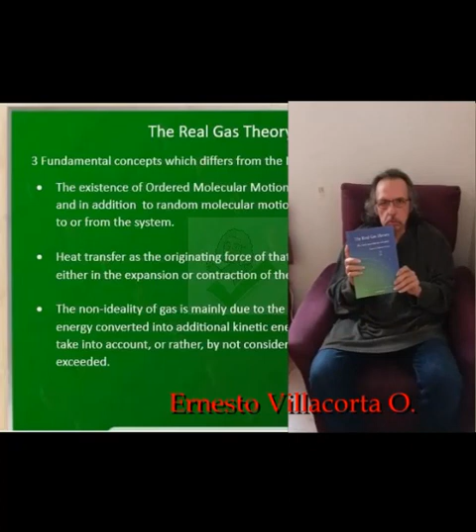Lastly, the non-ideality of the gas is mainly due to the portion of transferred heat energy converted into additional kinetic energy that the ideal gas does not take into account. By not considering it, that value is short or exceeded. Although the non-ideality affects the entire process, it is not exclusive to movement, but it is in the movement where it impacts practically in its entirety.

The portion of heat energy converted to kinetic energy is called the momentum enthalpy. The adjustment to the ideal gas so that it behaves like a real gas is called the residual enthalpy, and the equation obtained, its product, is called the residual enthalpy equation.

When the ideal gas behaves the same as the real gas, then the residual enthalpy is equal to 0, and when the ideal gas deviates from the real one, it is the adjustment that levels the relationship.

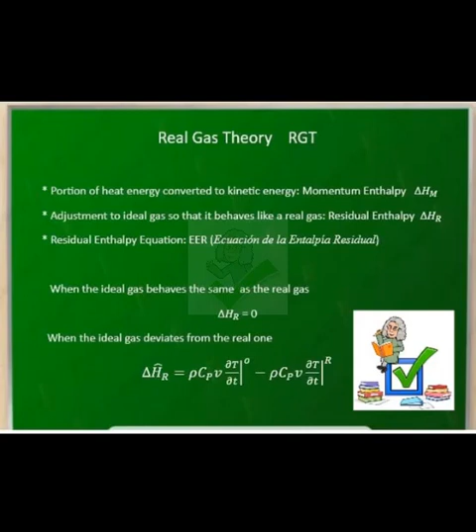The nature of the molecule intervenes in its energy conversion capacity, from calorific to kinetic. That is, intermolecular forces impact non-ideality, but the best way to take it into account is through the heat transfer mechanism. So oxygen, for example, has a different energy conversion capacity than nitrogen, as well as a different heat capacity and thermal conductivity.

The so-called equations of state are supported by factors that work inconsistently. That is, they can work well, but only for specific pressure and temperature ranges. Some may work satisfactorily for most cases but will inevitably deviate from the real value for some conditions or compounds. This is because these equations do not fully describe the thermodynamic phenomenon.

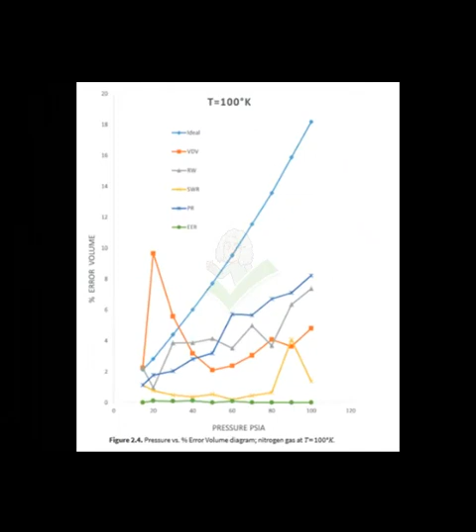Another way to visualize the expansion and contraction of a gas is presented here. Conventional texts handle the expansion of gas as a product of the increase in its temperature, resulting from an increase in the kinetic energy of its molecules, and the contraction as the reverse process. This is universally accepted, and this work is no exception.

The divergence with this theory consists of the trajectory these molecules follow when they are excited. By convention, it is accepted that these molecules collide and travel in a disordered way in random directions. Their trajectory depends only on the collision, and therefore the pressure is the product of millions of collisions with the walls of the container. RGT maintains that this is only partially valid.

In addition to random movement, we must add an ordered movement whose trajectory will depend on the geometric shape in which heat is being transferred to, or from, the system. Pressure changes are also related to the acceleration and deceleration of molecules.

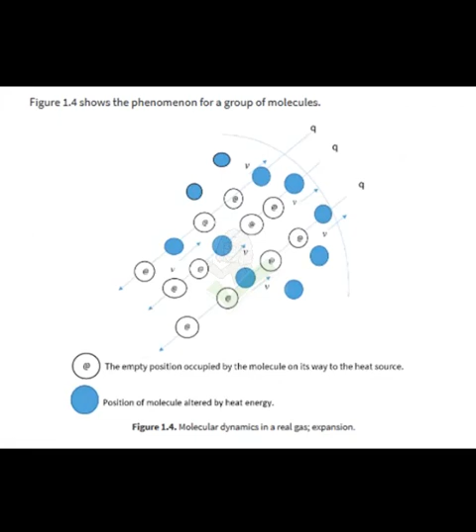Let us consider the following. Suppose you have a container 3 meters high and 2 meters in diameter with a 2-inch nozzle. This tank has any gas at a specific pressure. Under this scheme, the nozzle area represents only 0.02% of the total internal area of the tank.

The assumption that random collisions with the wall generate pressure suggests that, at the moment of opening the nozzle, the gas contained inside will come into contact with the outside, and consequently, the tank pressure will decrease because some of the gas molecules inside collide with each other and will come out through the hole as a consequence of a momentum generated by the collisions.

How, in a tank, does a system go from being chaos to being an ordered system only by passing through a hole? Because, while the nozzle itself could be the channeling of molecules, it would be at short distances between them and lower speeds, not at the random distances and speeds at which the molecules of a gas move in the MKT. That is, it would be at a distance between molecules and their velocities of a molecular flow, not of a random movement.

How is it possible that there is an orderly movement coming out of the nozzle instantly if there is chaos inside? What is the probability that a molecule will leave by 0.02% of a total area due to random collisions? Is that probability proportional to the rate at which pressure is released in the tank?

In this work, it is argued that, on the contrary, when excited, molecules undertake trajectories with defined tendencies towards a certain geometry. This geometry depends on the spatial form in which heat is being transferred, so that the molecule will take the opposite direction as the heat transfer.

The RGT states that chaos was ordered in density and pressure transient profiles, before passing through the hole.

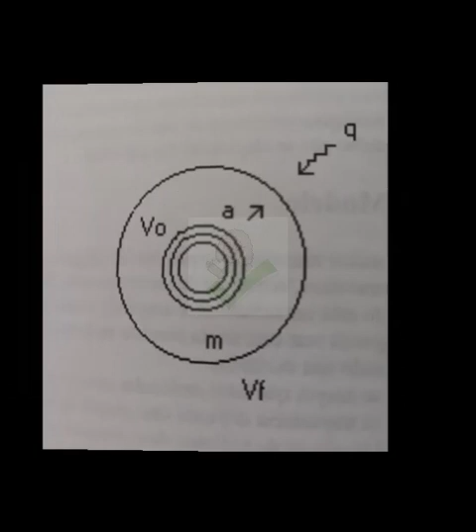Let us imagine a gaseous sphere of mass m, that is subjected to the action of a heat source Q. This sphere has an initial volume V0, and through the action of heat increases its volume to Vf, at a constant pressure. Located on the edge of V0, what can be seen is the movement of a vector normal to a plane with a velocity during a time t.

From the macroscopic point of view, this physical phenomenon can be considered a concentric flow stimulated by a change in density in the concentric layers, where the density and enthalpy profiles are generated by the temperature differential resulting from heat transfer. Figure 1.1 shows this system.

These transient profiles could be seen as expansive or contractive waves like water waves, whose velocity is a component of total molecular velocity. Like balls bouncing inside a truck that moves slower than them, that group of molecules already experience intermolecular forces, due to their proximity, so that these molecules travel in a group, apart from random movement, and behave already as a molecular flow.

Like any fluid flow, its molecules have the velocity of flow and the molecule's speed that make up it. The profiles are defined as transient because they fall apart eventually, and the molecules that formed them will separate.

The formation of transient profiles could be visualized as an equivalent phenomenon to when air is fanned. This creates profiles formed by the momentum transmission generated by the propellant object, but the gases that make up the mixture are elastic and eventually the molecules recover the separation between them. The velocity of the flow generated by the propellant is usually much lower than the random molecular speeds of its molecules.

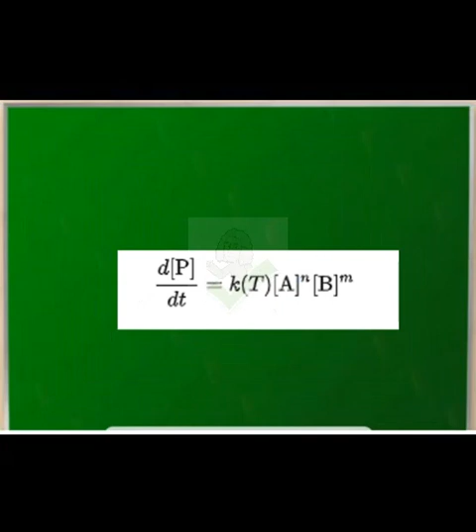The validity of MKT has been confirmed in different ways, for example, the rate of reaction in chemical processes. It is important to say that the RGT, rather than being an objection to MKT, it is a complement to this theory. It helps to explain circumstances that the MKT cannot explain, such as the case cited regarding the tank.

On the other hand, suppose you have a stoppered flask subjected to a heat source through the glass boundary. According to collision theory, the heat causes a molecular excitation in the contained gas leading to numerous shocks against the glass, which would cause the pressure to increase to the point of fracture of the glass.

Now, if the procedure is repeated but with the flask uncovered, it would be assumed that the event would be the same since the collisions are due exclusively to molecular excitation. However, the reality is that, under the latter conditions, the flask does not fracture.

Why? What is the reason that prevents the flask from breaking? If the collisions and trajectories are assumed to be totally random, they do not depend on the presence of a stopper. Furthermore, if we grant that the excited molecules exit through the hole instead of hitting the glass, how do we explain when they stop coming out of the hole? This question cannot be answered by collision theory.

MKT cannot explain how the leakage of molecules in an open flask, subject to a heat source, is stopped eventually. The explanation can only be given through a connection between the microscopic and macroscopic vision of the aforementioned phenomenon.

That is, the equilibrium between two momentum-generating forces, the pressure differential dP and that of the momentum enthalpy, and this is because of the formation of transient pressure and density profiles.

For MKT this does not happen because of random movement, separation between molecules and the absence of intermolecular forces, but neither does it explain how it is that the molecules at a certain moment stop leaving the flask, or how they be ordered from the chaos before leaving the tank, as it happens in reality.

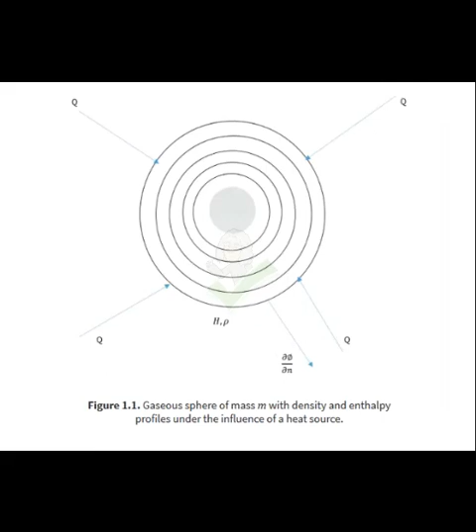The RGT explains this through the formation of transient profiles, and this, if and only if, there is heat transfer to or from the system. That is, in the absence of heat transfer, such profiles are not formed.

As a result of an energy balance that we will see later, we obtain the differential of the momentum enthalpy. The negative sign in the equation means that the direction of the velocity vector is opposite to that of the heat transfer. So how to explain the phenomenon that occurs inside the flask shown above?

The transferred heat generates transient profiles of density, enthalpy, and pressure, as shown in figure 1.6. This creates two opposite forces. The first is represented by the differential of the momentum enthalpy, and the second can be defined as the momentum generated by a change in gas pressure, called Euler's equation, with the opposite sign to the momentum enthalpy differential.

So both forces generate the balance to avoid the fracture of the glass, and it establishes that there is a limit on the leakage of molecules from the open flask. In figure 1.6, as the temperature continues to rise, a point will be reached where the outward directed momentum will dominate over its counterpart, and the glass will fracture because the plug does not allow pressure to be released. The molecules will push each other, transferring momentum to the glass and causing its fracture.

For the unstoppered flask in figure 1.7, the system is the same, with the difference that pressure is released through the orifice by allowing gas to escape until the pressure equalizes with atmospheric pressure. The molecules do not reach the necessary momentum magnitude to cause the glass fracture, due to the action of its counterpart. The rest of the gas does not leave because it is in equilibrium.

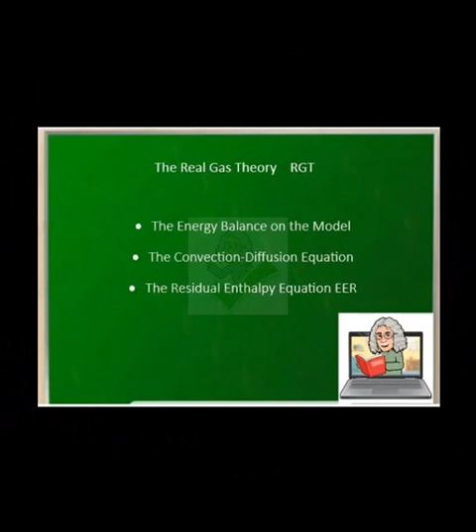The energy balance on the model, the convection diffusion equation, and the residual enthalpy equation EER. Applying the energy balance on a model, the energy change within the system accounts for three types: internal energy, kinetic energy, and potential energy. The energy of the surroundings consists of the heat transferred and the work done, shown in equation 1.1 or 1.2. Equation 1.3 shows how the heat is conformed.

The heat is composed of the enthalpy of the gas delta H, the momentum enthalpy, which is the portion of heat energy converted to kinetic energy, delta Hm, and the adjustment between ideal gas and real gas, delta Hr, which is called residual enthalpy. When the ideal gas behaves like a real gas, then the residual enthalpy is equal to 0.

But when the ideal gas moves away from the real gas behavior, the heat Q is equal to the residual enthalpy plus delta Hg, as shown in 1.3a. Delta Hg is the amount of caloric energy transferred for a real gas, and it is composed of the enthalpy of the gas and momentum enthalpy delta Hm, as shown in equation 1.3b. It is important to remember that delta Hm represents the quantity of energy destined to molecular movement.

Introducing the internal energy in equation 1.4, for the case where delta Hr is equal to 0, and considering only the work done by the mass of the fluid, then W equals delta PV in a process at constant pressure, where, in addition, the effects of gravity will be conveniently neglected. If we combine equations 1.3 and 1.4 with equation 1.2, we have equation 1.5.

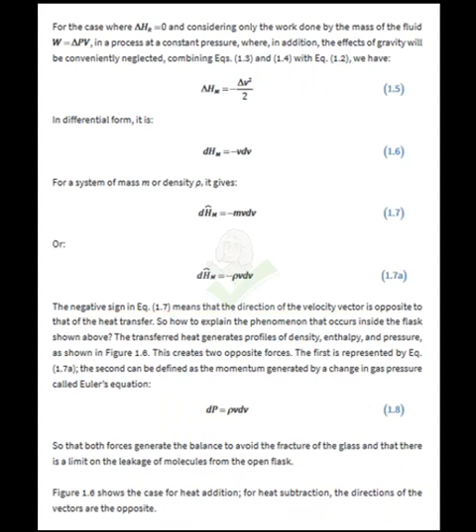We can use the convection diffusion equation to explain the concept of momentum enthalpy and residual enthalpy. Equation 1.9 is presented in two dimensions. The version of equation 1.9 for one dimension, applied to the ideal heat energy, gives equation 1.10. In equation 1.10, the first term on the right is the ideal caloric term, and the second is the ideal caloric inertial term.

The heat energy for a real gas is given by equation 1.11. In equation 1.11, the first term on the right is the real gas caloric term, and the second is the real gas caloric inertial term. It's important to notice that this last term is the momentum enthalpy, that is, the amount of caloric energy converted into kinetic energy of gas molecules.

The combination of equations 1.10 and 1.11 with equation 1.3a results in equation 1.12. The RGT maintains that, although the non-ideality of gas affects the entire process, it is in molecular motion where it manifests itself practically in its entirety. That is why it is considered that ideal and real caloric terms have very similar value, as shown in equation 1.13.

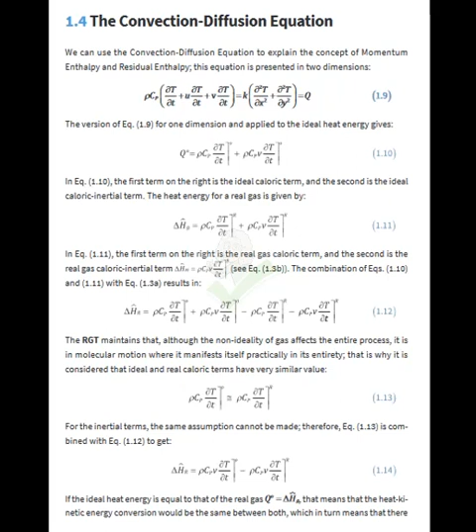For the inertial terms, the same assumption cannot be made, therefore, equation 1.13 is combined with equation 1.12 to get equation 1.14. If the ideal heat energy is equal to that of the real gas, that means that the heat kinetic energy conversion would be the same between both, which in turn means there would be no residual enthalpy delta Hr, and then the caloric kinetic terms would have the same value, as shown in equation 1.15.

Residual enthalpy delta Hr per time unit is related to the kinetic energy of the system and is the adjustment that levels the relationship between ideal and real gas. The box shows the possible circumstances for delta Hr, presented and drawn in figure 1.8.

If delta Hr is greater than 0, it means the ideal inertial term is greater than the real one; in figure 1.8 the vector of the ideal term is shown greater than the real one. If delta Hr is less than 0, the real inertial term is greater than the ideal one.

In figure 1.8 the vector of the real term is shown greater than the ideal one. If delta Hr equals 0, then both terms are equal, and so are their vectors.

The way to relate the parameters P, V, and T with the residual enthalpy, delta Hr, is the residual enthalpy equation, EER, presented in equation 1.16. Considering moles and mass, we get equation 1.17 or equation 1.18.

Notice that equation 1.19 shows that the adjustment of the ideal gas so that it behaves as a real gas, called delta Hr, is circumscribed exclusively to molecular motion, that is, an adjustment of the kinetic energy of the gas, as we saw in equation 1.14. That's why equation 1.16 is called EER.

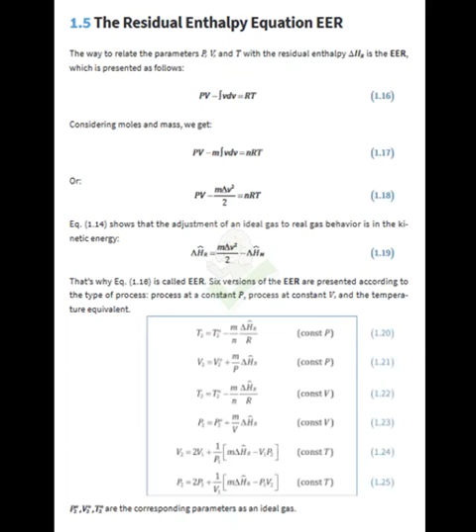Examples solved with different equations of state. Constant volume process: let us suppose an identical system described in figure 1.1, but now with a solid border as a container. The velocity of the furthest layer is equal to 0. For demonstration purposes, thermal conductivity is neglected in this border. We are looking to describe the thermodynamic phenomenon inside the sphere, not at the border.

For an ideal gas, the internal energy is a function of temperature only, so enthalpy and Cp are too. That is the reason why the heat may be obtained with equation 2.31. This applies for all types of processes, not only the constant pressure process.

Example 2.1: Nitrogen gas at 85 psia will be heated from 276 degrees Kelvin to 292 degrees Kelvin at constant volume V equals 2.2336 cubic feet. We want to know the final pressure. We take the system as 1 pound mass of gas, contained in an imaginary sphere container.

We have the following information from nitrogen thermodynamic tables. From equation 2.31 we obtain the amount of heat Q superscript O. The amount of heat, delta Hg, for real gas is obtained by subtracting the enthalpies of states 1 and 2. Using equation 1.3a with the calculated amounts of Q superscript O and delta Hg, we obtain the residual enthalpy, delta Hr. The pressure for the ideal gas is obtained as usual.

We take the system as 1 pound mass of gas, see figure 1.1. We have the following information from nitrogen thermodynamic tables. So we get the amounts of Q superscript O, delta Hg and delta Hr the same way as in the previous example. The ideal gas volume is calculated as usual.

Substituting these values with the information gotten in equation 1.21 results in obtaining the real gas volume. This value is equal to the datum reported for the experimental volume.

Table 2.1 shows several data for the volume obtained by different equations of state for a given temperature and pressure. The equations used are the ideal gas equation, abbreviated as ideal; the van der Waals equation, abbreviated as VDV; the Redlich-Kwong equation, abbreviated as RW; the Soave-Redlich-Kwong equation as SWR; the Peng-Robinson equation as PR.

And finally, the equation of this theory, the residual enthalpy equation, as EER. All these equations are compared to the experimental data reported, abbreviated as EXP. As shown in Table 2.1, the range of greatest deviation in relation to EXP is at high pressure and low temperature, as expected, with one exception: the EER, which maintains similarity with EXP across the whole range.

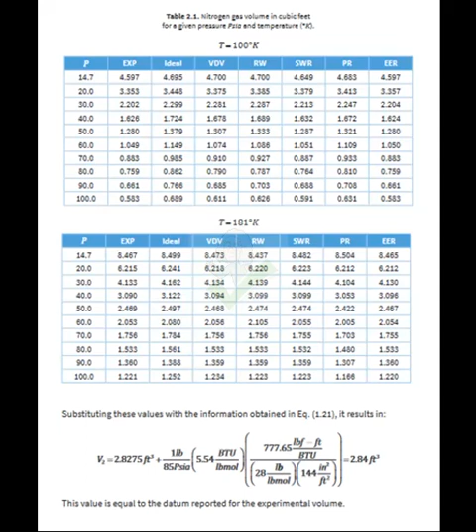For example, we chose conditions like high pressure and low temperature: the state at T equals 100 degrees Kelvin and P equals 100 Psia. The experimental datum for volume under these conditions is 0.583 cubic feet. For ideal gas, it is 0.689 cubic feet. Its deviation from EXP represents an 18% error.

For VDV, the volume is 0.611 cubic feet, a 4.80% error. RW presents a volume of 0.626 cubic feet and a 7% error. SWR got 0.591 cubic feet, 1.37% error. For PR, the volume is 0.631 cubic feet with an 8% deviation error. Finally, EER got a volume of 0.583 cubic feet, which represents a 0% error. Therefore, the value obtained by EER and the one of EXP are the same.

Figure 2.3 shows the graphic for the data of Table 2.1: pressure versus volume at 100 degrees Kelvin for ideal, EER, and EXP data.

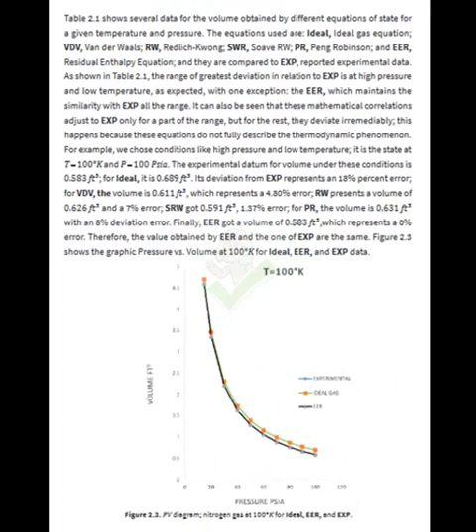Figure 2.4 shows the graphic for the data of Table 2.1 as well, but now for pressure versus percent error volume. Percent error volume means the percentage of deviation of the volume obtained for a given equation of state in relation to the volume reported as experimental data.

In Figure 2.4 we can see how the ideal gas equation deviates markedly as pressure increases, but it is not the only one. What should be noted here is how the residual enthalpy equation EER remains constant all the time at an error rate very close to 0%.

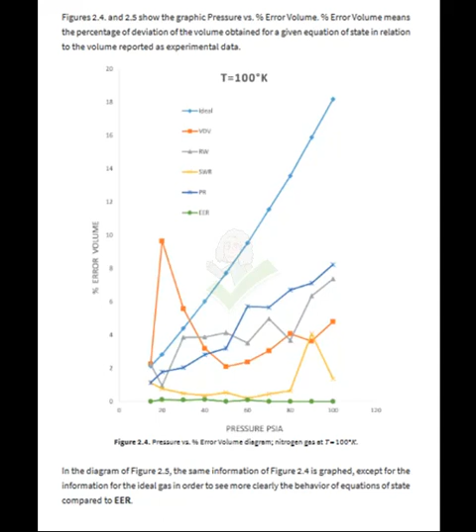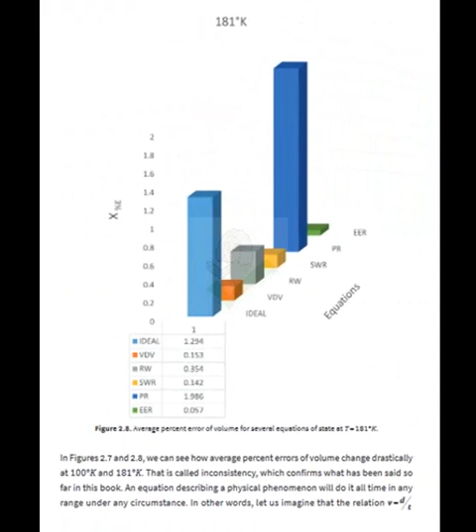Figure 2.8 shows a graph of the average percent error of volume for the same equations of state, but now at T equals 181 degrees Kelvin. In figures 2.7 and 2.8, we can see how average percent errors of volume change drastically from 100 degrees Kelvin to 181 degrees Kelvin. That is called inconsistency, with only one exception, the EER equation.

In summary, it can be concluded that the EER differs greatly from the rest of the equations of state in terms of its accuracy in describing the behavior of the real gas.

To obtain the molecular flow velocities in feet per second, some assumptions need to be made. To begin with, it is considered an imaginary gaseous sphere as a model, as presented in Figure 1.1. In addition, the velocities considered are those of the layers farthest from the center, that is, those of the boundary of the sphere.

Finally, it is defined that the heat transfer process, the temperature change, takes place in a period of 1 second. Therefore, the change in the volume of the gas with respect to time is defined as shown in equation A.1, where r is the radius of the gaseous sphere, see figure A.1. So that the molecular velocity of the momentum enthalpy delta Hm, MFV in feet per second, may be obtained by the equality defined in equation A.2a.

The molecular flow velocity for a cube may be obtained with equation A.2b, where L is the side of the cube. Note that the MFV, V, will have different value according to the geometric figure, for the same volume differential, dV. Although the procedure cited here is standard, that of equations A.2a and A.2b, the words momentum enthalpy are added, because the final volume used here is the one obtained by the EER.

Example A.1. We have 1 pound of 5 cubic feet nitrogen at 14.7 psia. At these conditions the gas is at 110 degrees Kelvin. On the other side there is 5 cubic feet of 1 pound of oxygen with the same pressure at 124 degrees Kelvin. Both gases are subjected to a heat source of

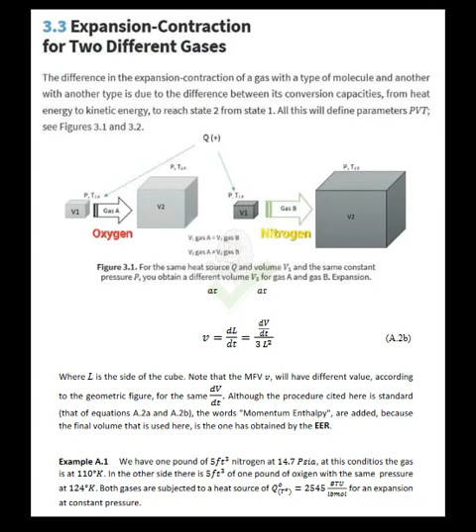2545 BTU per pound mole, for an expansion at constant pressure. It is important to emphasize here that Q superscript O, subscript TO, is the heat as a function of the temperature of the ideal gas. Different from that function of heat of examples 2.1 and 2.2, that is the heat as a function of the temperature of the real gas.

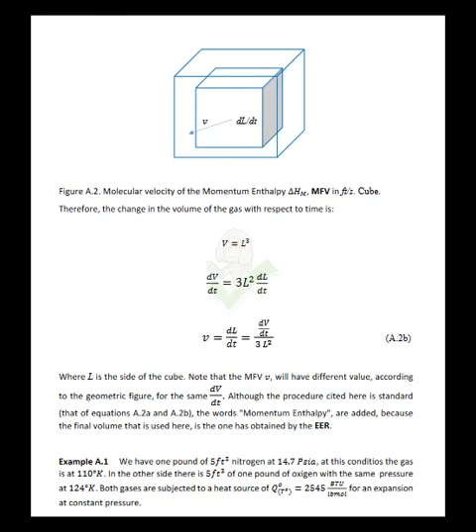Determine the momentum enthalpy molecular flow velocities, MFV, in feet per second. The incomplete scheme is the one as shown. Nitrogen and oxygen information is taken from thermodynamic tables. Figures A.3a and A.3b show the distribution of its respective heat capacities. We use a mean heat capacity, as the one written in equation A.3.

By using equation 2.31, we may have the final temperature of nitrogen as an ideal gas, that is 311.8 degrees Kelvin. Then the final volume of nitrogen as an ideal gas is 14.17 cubic feet.

The final temperature of oxygen as an ideal gas is 325.7 degrees Kelvin. Then, the final volume of oxygen as an ideal gas is 13.13 cubic feet.

With the temperatures gotten, and using them in the thermodynamic tables of nitrogen, we have that the delta Hg is 2544.5 BTU per pound mole. The delta Hr is obtained by substitution for delta Hg in equation 1.3a, this amount gives 0.5 BTU per pound mole.

With the temperatures gotten, and using them in the thermodynamic tables of oxygen, we have that the delta Hg is 2544.6 BTU per pound mole. And the delta Hr gives 0.4 BTU per pound mole, like it is shown in equation A.7.

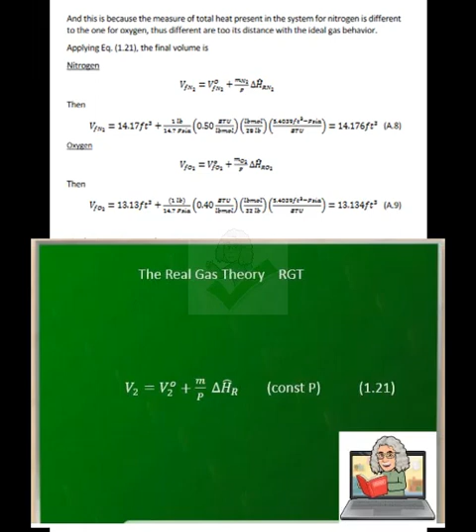Applying equation 1.21, the final volume is 14.176 cubic feet. And the final volume for oxygen is 13.134 cubic feet, as it is shown in equation A.9.

The final temperatures for real gases are 311.87 Kelvin for nitrogen and 325.72 degree Kelvin for oxygen.

Finally, the complete scheme is presented. Therefore, the volume change per unit of time is 14.176 minus 5, equal to 9.176 cubic feet.

Taking as volume that of an imaginary sphere, the radii for states 1 and 2 are 1.0608 feet for radius of state 1, and 1.5013 feet for the radius of state 2. From equation A.2a, and incorporating the corresponding information, we have that the molecular flow velocity is 0.3239 feet per second, as shown in equation A.10.

For oxygen, the volume change per unit of time is 13.134 minus 5, equal to 8.134 feet per second. The radius obtained for state 2 of the sphere is 1.4636 feet. The momentum enthalpy molecular velocity, MFV, is 0.3021 feet per second.

There exists a relationship between the molecular velocity MFV and the final volume in a process. Since the MFV of nitrogen is greater than that of oxygen, then the final volume of nitrogen is greater too than the final volume of oxygen. The fact is, that the greater the distance traveled in a period of time, the greater the area covered.

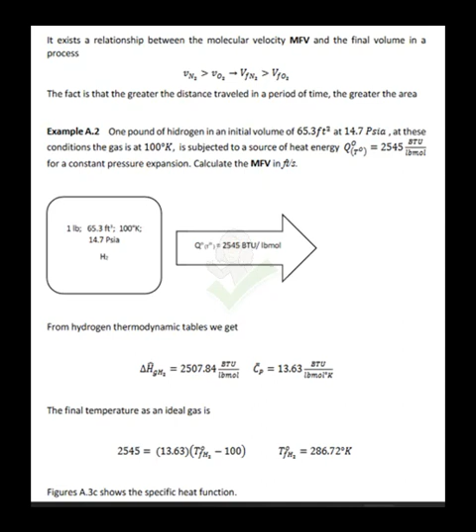From hydrogen thermodynamic tables we get the delta Hg and the Cp. See figure A.3. The final temperature as an ideal gas is given in equation A.12. And the residual enthalpy in equation A.13. Therefore, the final volume of hydrogen is 194 cubic feet as shown in equation A.14.

And the final temperature for the real gas is 297.1 degrees Kelvin. The complete scheme is presented. The radius for state 2, obtained from the sphere, is 3.5911 feet. The volume change per unit of time is 194 minus 65.3, equal to 128.7 feet per second.

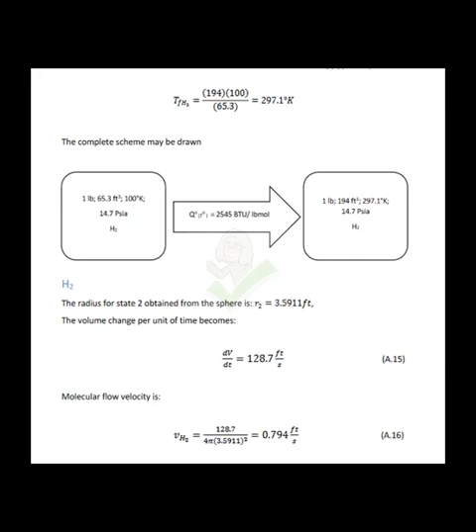The molecular flow velocity is 0.794 feet per second as shown in equation A.16.

Example B.1: several gases are subjected to the same process for comparison. The process consists of a constant pressure expansion at 14.7 psia. One pound of gas in 10 cubic feet is subjected to a heat source of 2500 BTU per pound mole, then subjected to a contraction by removing 2000 BTU per pound mole of heat energy. A) Make a comparison of gases. B) Repeat the comparison of point A for different pressures. C) Determine the MFV for the gases.

Figure B.1 presents the data obtained, calculated with the tools of RGT that we have seen here. The subscript O means it belongs to the initial state, the subscript 2 means it belongs to the final state for expansion but the initial state of contraction, and the subscript F means it belongs to the final state of contraction.

An efficient tool to compare the performance of gases is what we call the elasticity index E, closely related with the MFV, presented in equation B.1. Parameter M subscript WCPM is the molecular weight multiplied by an average of the expansion-contraction heat capacity.

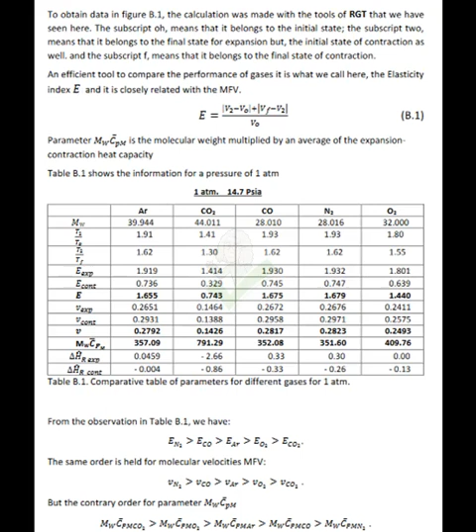The same order is held for molecular flow velocity, MFV. But for the parameter M subscript WCPM, the order is exactly the contrary: the greatest is carbon dioxide, followed by oxygen, then argon, then carbon monoxide, and the smallest is nitrogen.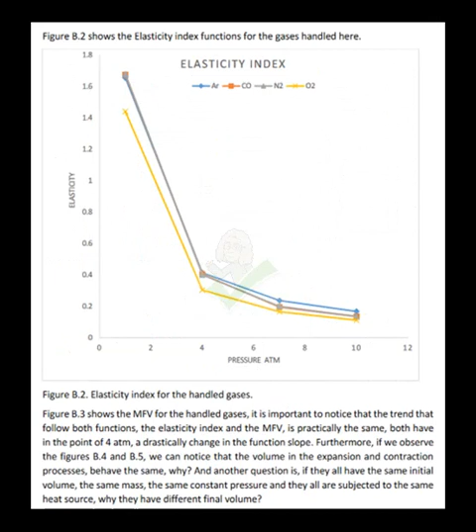Figure B.2 shows the elasticity index functions for the gases handled here, for different processes of constant pressure. Figure B.3 shows the MFV functions. For the handled gases, it's important to notice that the trend followed by both functions, the elasticity index and the MFV, is practically the same. Both have at the point of 4 atm a drastic change in the function slope.

Furthermore, if we observe figures B.4 and B.5, we notice that the volume function in the expansion and contraction processes behaves the same as the MFV and elasticity index functions. Why? And another question: if all gases have the same initial volume, the same mass, the same constant pressure, and are all subjected to the same heat source, why do they have different final volumes?

We can observe the following: the trend followed by the functions of the gases is the same, and the order followed among the functions of the gases is the same. 4 atm is clearly the point of divergence between the functions of the gases, the pressure at which the trends in the functions of argon, nitrogen, and carbon monoxide get distance from each other with respect to the measured parameters.

This is due to the Cp, as we will see later. The point at 4 atm also establishes a marked change in the rate of change of the graphed functions of the gases. This is because of the relationship PVT, as we will see later.

Figure B.6 shows that, for the 1 atm system, the ratio between temperatures T2 and T1 is almost twice, until reaching the 10 atm system, where the proportion is reduced to almost unity. This change is not gradual; the ratio is abruptly reduced at the 4 atm system.

That behavior is already defined by the PVT relationship. Figure B.7 shows the PVT behavior of argon gas, with isotherms in the PV diagram. At the 4 atm point, an abrupt change occurs with respect to the trajectory the volume function follows for the following systems of 7 and 10 atmospheres.

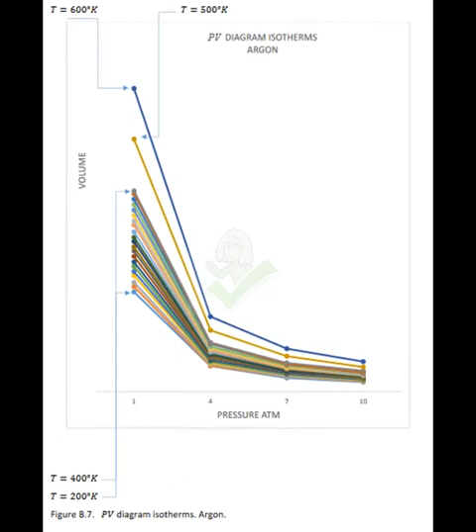The other gases have diagrams very similar to this. The point at 4 atm appears in all the graphs we have studied as a point of change in the trend of the functions, because this is how the PVT relationship defines it for the gases handled. That is, the tendency is already established by the PVT diagram.

Suppose, for example, a process by which the temperature of the gas is increased from 200 Kelvin to 600 Kelvin at 1 atm, then another process with the same temperature range but at 4 atm, another at 7 atm, and finally one at 10 atm. Figure B.8 shows the scheme for this case.

The delta V is the isobaric line and shows the segments of final volume minus initial volume obtained for each system, from 1 atm to 10 atm. The proportion between segments is presented in equation B.2a.

We can clearly see that, since the point at 4 atm, the trend in the reduction of volume segments changes markedly. This case is similar to the example we have been discussing, with the difference that example B.1 reaches temperatures up to 3314 Kelvin, and that the initial volume is 10 cubic feet on all systems.

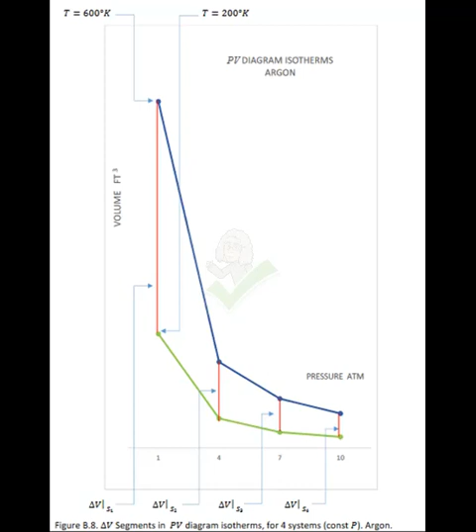For the other gases the trend is the same, although the delta V segments are of different sizes, meaning the final volumes Vf are different. It is more notorious from the point at 4 atm.

Figure B.9 shows the 200 Kelvin and 600 Kelvin isotherms for argon and carbon monoxide. You can clearly see the same trend, and also the difference between the volume segments of argon delta V and those of carbon monoxide delta V.

It is concluded that the PVT relationship defines the trend of the function, but the size of the segments of the isobaric line is defined by the nature of the gas. That is, the capacity to convert caloric energy into kinetic energy will define temperature in state 2 and then volume of state 2, so that the argon segments are greater than those of carbon monoxide.

The molecular kinetic theory, MKT. The mean molecular speed, VMS, in feet per second. Joule's experiments on heat, as well as Bernoulli's investigations, served as the basis for Joule, Clausius, Maxwell, and Boltzmann to develop the MKT, in the period between 1848 and 1898.

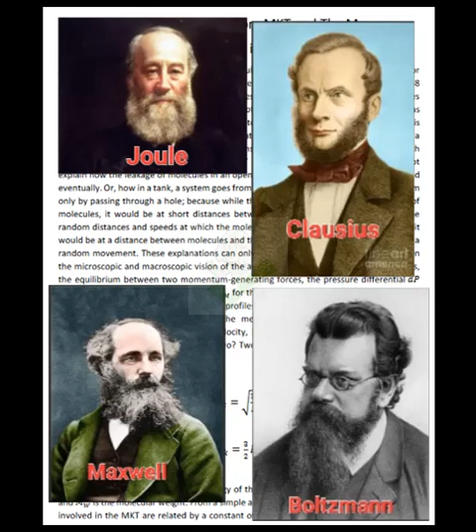Also known as kinetic theory of gases, which is based on the idea that all gases behave in the same way as far as molecular motion is concerned. The validity of MKT has been confirmed in different ways, for example, the rate of reaction in chemical processes.

It is important to repeat, so that it is clear: RGT, rather than being an objection to MKT, is a complement to this theory. For example, it explains circumstances that MKT cannot explain, such as the case cited in the above section of the RGT regarding the flask, and why MKT cannot explain how the leakage of molecules in an open flask, subject to a heat source, is stopped eventually.

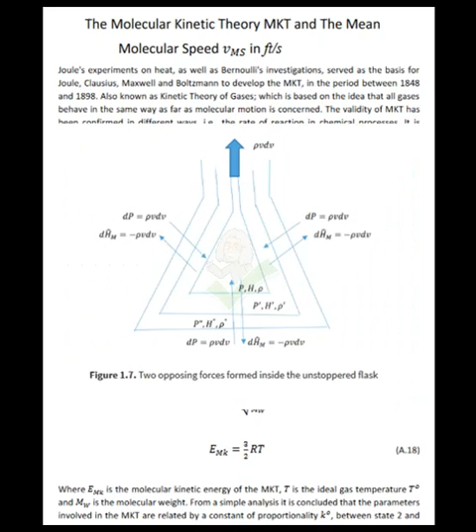Or how in a tank, a system goes from being chaotic to being ordered only by passing through a hole, because, while the nozzle itself could be the channeling of molecules, it would be, at short distances between them and lower speeds, not at the random distances and speeds at which molecules of a gas move in the MKT. That is, it would be a distance between molecules and velocities of a molecular flow, not of random movement.

These explanations can only be given through a connection between the microscopic and macroscopic vision of the aforementioned phenomenon. That is, the equilibrium between two momentum-generating forces: the pressure differential dP and the momentum enthalpy dHm, for the case of the flask. And in the case of the tank, that chaos was ordered in transient profiles before passing through the hole. How to relate both theories?

How to relate the mean molecular speed VMS of MKT with the momentum enthalpy molecular velocity, MFV, in feet per second, and how to explain the huge difference in magnitudes between the two.

Two of the equations that make up the MKT are A.17 and A.18, where E subscript Mk is the molecular kinetic energy of the MKT, T is the ideal gas temperature T superscript O, and M subscript W is the molecular weight.

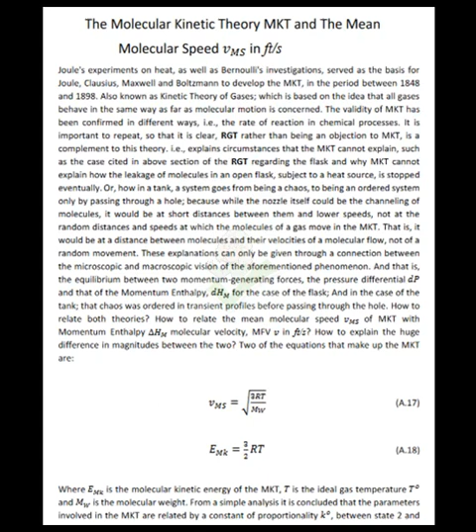From a simple analysis, it is concluded that the parameters involved in the MKT are related by a constant of proportionality K superscript O, between state 2 and state 1, or K for real gas. This constant represents the connection between the microscopic and macroscopic state, between MKT and RGT, and relates the mean molecular speed of MKT, VMS, with the momentum enthalpy molecular velocity, MFV.

In the box is shown the equations that relate state 1 and 2 by the constant K superscript O: for kinetic energy, equation A.19; for molecular speed, equation A.20; for the volume, equation A.21; and finally, for the temperature, equation A.22.

MKT is based on ideal gas concepts. The superscript is used in the constant K superscript O because it represents an ideal gas-based constant. It is also based on 1 pound-mole, but for purposes of the constant, which is a quotient, it is dimensionless.

The real gas constant K is obtained from the division of the temperatures of real gas, gotten with the EER, and can be simply substituted for K superscript O in equation A.20 to obtain real gas speeds, because this equation, although it belongs to the ideal gas, does not require an additional procedure to obtain real gas values, as will be shown later.

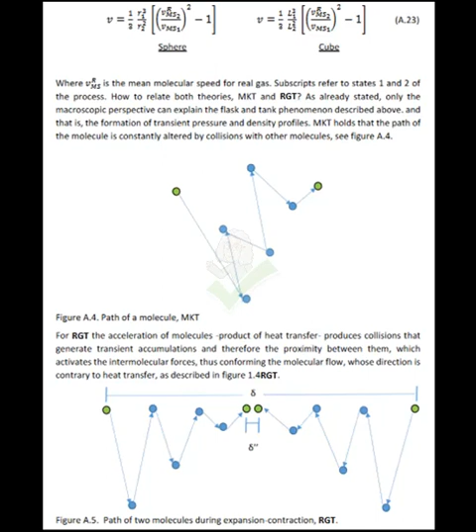The MKT holds that the path of the molecule is constantly altered by collisions with other molecules, see figure A.4. For RGT, the acceleration of molecules product of heat transfer produces collisions that generate transient accumulations and therefore the proximity between them, which activates the intermolecular forces, and thus conform the molecular flow, whose direction is contrary to heat transfer, as described in figure 1.4.

Considering that the molecules already have a random movement before heat transfer starts, with their respective molecular speeds Vms, once it begins, the transient profiles are formed and the molecular flow starts at a velocity in the order of 4,300 times lower than the mean molecular speed for certain conditions of gases, such as nitrogen, oxygen, and argon, and begins the described mechanism in figure 1.4.

Behaving already as a molecular flow, like any fluid flow, the profiles are defined as transient because they fall apart eventually and the molecules that formed them separate. The proportionality between the mean molecular speed of the MKT, VMS, with the molecular flow MFV, at certain PVT conditions, is presented in equation A.24.

With a rough calculation, we state that the distance between molecules is reduced at a similar proportion, as it is presented in equation A.26. Equation A.26 shows an idea of how much the distance between molecules is reduced transiently.

This temporary reduction should not be seen as a conventional compression of the gas. First, because a generated molecular momentum is involved. Second, because it is only a group of molecules, and third, because the gas is elastic and eventually the molecules will recover the original distance between them, and even increase it in the case of expansion. For contraction the process is reversed, for example, the vector's orientation, etc.

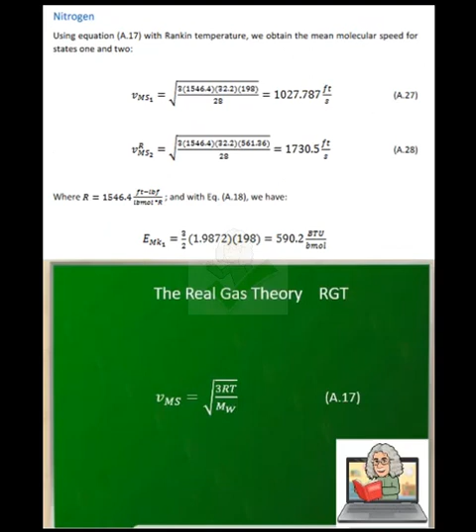The nitrogen temperatures in example A.1, in Rankine, are T1 equals 198 degrees Rankine and T2 equals 561.36 degrees Rankine. Using equation A.17 and with equations A.27 and A.28 we can obtain the mean molecular speeds. With equation A.23, and using the radii of example A.1, we have that the molecular flow velocity is calculated in equation A.29. This is exactly the same result as the one obtained in example A.1.

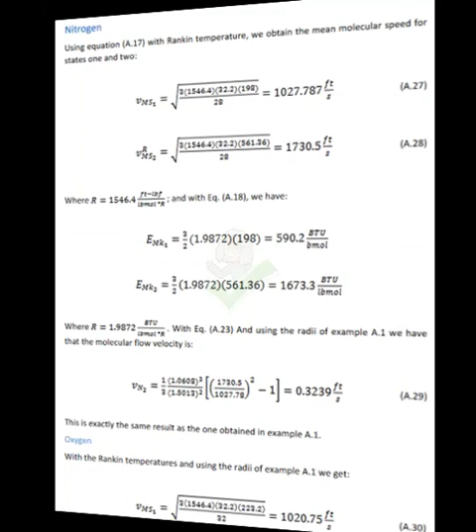The oxygen temperatures in example A.1, in Rankine, are T1 equals 223.2 degrees Rankine and T2 equals 586.26 degrees Rankine. With equations A.30 and A.31 we can obtain the mean molecular speeds. Using the radii of example A.1, we have that the molecular flow velocity is calculated in equation A.32.

Example A.4: calculate the hydrogen mean molecular speeds gotten in example A.2, but now with the MFV in the expansion process, by ideal gas and by real gas. The information we have from example A.2 is: the MFV of hydrogen is 0.794 feet per second, V1 equals 65.3 cubic feet, R2 equals 3.5911 feet, T1 equals 180 degrees Rankine, T2 equals 534.6 degrees Rankine, and T2 superscript O equals 516 degrees Rankine.

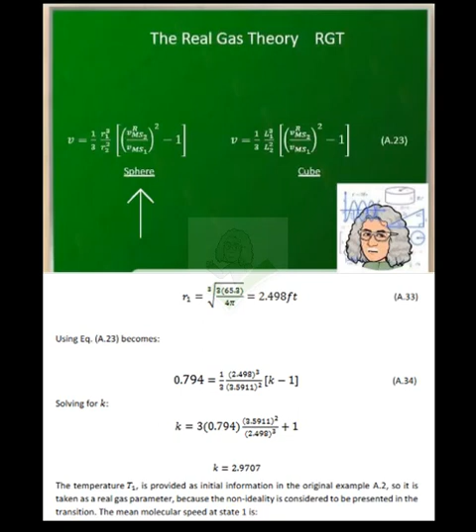R1 is obtained with equation A.33 and is 2.498 feet. Using equation A.23, and solving for K, the equation A.34, we get that K equals 2.9707. The mean molecular speed for state 1 is 3666.66 feet per second.

The mean molecular speed of real gas in state 2 can be obtained with equation A.20, using the real gas constant K, and may be written in equation A.36. It has a value of 6,319.59 feet per second. We can also use equation A.17 with the temperature T2 as presented in equation A.37, which is the same result got in the immediately preceding calculation.

This finding is fundamental to verify what has been said in RGT: that the non-ideality of gases lies mainly in a phenomenon of a thermal nature, rather than of a volumetric nature. Or rather, the volumetric effect is a consequence of the thermal effect, and the ratio K superscript O divided by K is a measure of the non-ideality of gases.

For the ideal gas, we obtain the constant for ideal gas with equation A.38. The mean molecular speed of state 2 for ideal gas is obtained with equation A.20 using K superscript O and has a value of 6,208 feet per second, as shown in equation A.39. We can also use equation A.17 with the temperature of the ideal gas in state 2, as written in equation A.40, with the same result as equation A.39.

The magnitude of the mean molecular speed for ideal gas deviates from its equivalent for real gas in the same proportion by which V2 deviates from V2 superscript O, obtained with RGT. This reaffirms the validity of the constants K and K superscript O, as well as the relationship between them. And the validity of the link between MKT and RGT is confirmed, as shown in equation A.41.

How to relate this to RGT? The next schematic describes how RGT relates with MKT, using equation A.41 and equation 1.21. Equation A.43 shows the relationship between MKT and RGT. The ratio between molecular velocities, the random mean molecular speed divided by the molecular flow for hydrogen, is different to that of the gases handled in the previous examples, about 6,000.

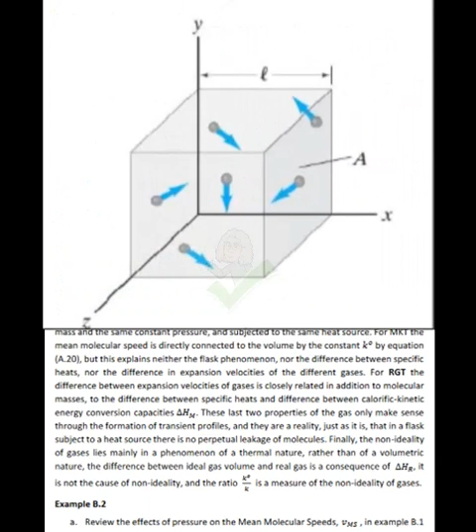In summary, for MKT the only distinguishing factor between different gases, with respect to mean molecular speeds in equation A.17, and therefore to their molecular momentums, apart from temperature, is their molecular mass. For the RGT there is no problem with that. The difference between MKT and RGT arises first by the adjustment to real gas, but above all by the formation of transient profiles. For MKT, they do not exist; it does not consider them.

RGT considers that the transient profiles of the gases distinguish one gas from another, as a consequence of the distinction between their momentum enthalpies, delta Hm. These profiles generate the difference between expansion velocity, MFV, of different gases, and consequently, their final volumes for the same initial mean molecular speed — see example B2 — the same initial volume, the same mass, and the same constant pressure, subjected to the same heat source.

For MKT the mean molecular speed is directly connected to the volume by the constant K superscript O, by equation A.20, but this explains neither the Flask phenomenon, nor the difference between specific heats, nor the difference in expansion velocities of the different gases.

For RGT the difference between expansion velocities of gases is closely related, in addition to molecular masses, to the difference between specific heats and difference between calorific kinetic energy conversion capacities, delta Hm. These last two properties of the gas only make sense through the formation of transient profiles, and they are a reality, just as it is that in a flask subject to a heat source there is no perpetual leakage of molecules.

Finally, the non-ideality of gases lies mainly in a phenomenon of a thermal nature, rather than of a volumetric nature. The difference between ideal gas volume and real gas volume is a consequence of the delta Hr, but it is not the cause of non-ideality, and the ratio K superscript O divided by K is a measure of the non-ideality of gases. The cause of non-ideality is the portion of converted kinetic energy that wasn't taken into account from a heat source.

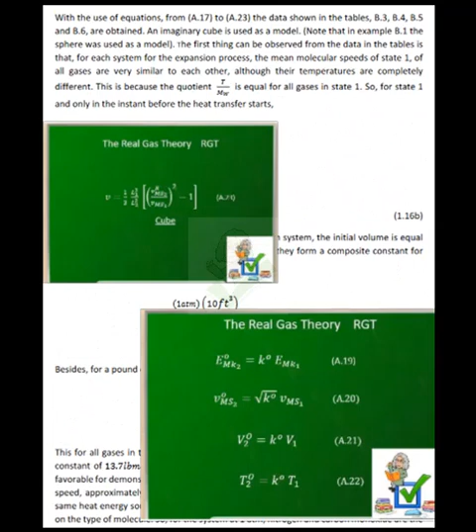Example B.2. Analyze the effects of pressure on the mean molecular speeds, VMS, in example B.1. With the use of the equations from A.17 to A.23, the data shown in tables B.3, B.4, B.5 and B.6 are obtained. An imaginary cube is used as a model. Note that in example B.1 the sphere was used as a model.

The first thing that can be observed from the data in the tables is that for each system, for the expansion process, the mean molecular speeds of state 1 of all gases are very similar to each other, although their temperatures are completely different. This is because the quotient T/MW is equal for all gases in state 1.

So, for state 1, and only in the instant before the heat transfer starts, the term for the kinetic energy in the EER equation equals 0. Then, the equation is reduced to equation 1.16b.

The pressure is the same for all processes of the 1 atm system, the initial volume is equal to 10 cubic feet. Together with the universal constant, they form a composite constant for the processes in table B.3, with a value of 13.7 pound-mole degrees Rankine, for all gases, as shown in equation 1.16c.

That is the reason why the initial mean molecular speeds are the same for all gases in example B.2. For systems of 4, 7, and 10 atmospheres, the resulting constant of 13.7 pound-mole degrees Rankine is multiplied by 4, 7, and 10 respectively. The situation is very favorable for demonstration purposes, since you have all gases at the same mean molecular speed in state 1, but different speeds in state 2.

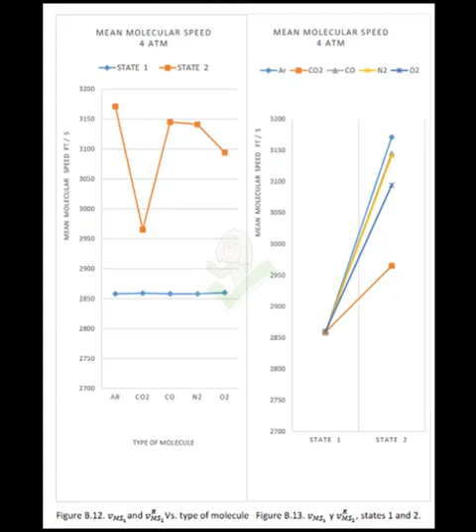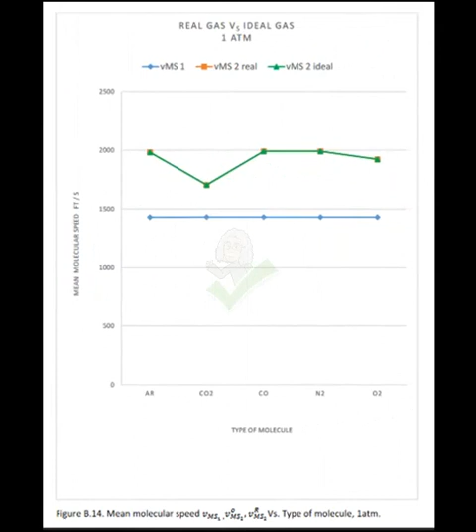Figure B.14 shows the mean molecular speeds for states 1 and 2, for ideal gas and for real gas, in the system at 1 atm, where it can be seen that there is no marked difference between ideal gas and real gas. The difference arises in the system for 4 atm, shown in figure B.15.

Where it can be clearly observed how the behavior of the molecules, both nitrogen and carbon monoxide, move markedly away from the behavior of an ideal gas. However, argon, oxygen and carbon dioxide still behave much like ideal gas.

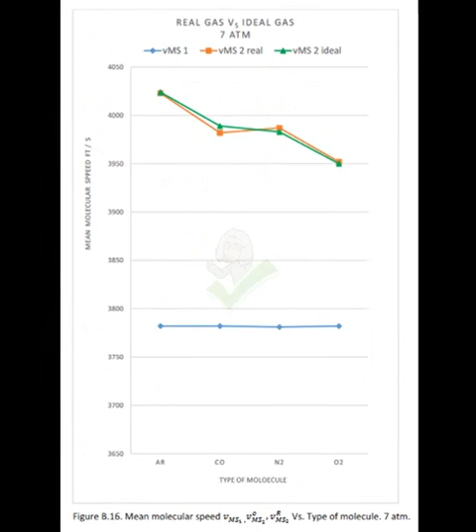At the point at 4 atm, not only is the divergence between functions presented and the tendency of these changes marked, but also the non-ideality of some gases is manifested more clearly. The same happens for the system at 7 atm, although the difference is not as marked, as can be seen in figure B.16. Finally, for processes in the system at 10 atm, the difference between real gas and ideal gas is not distinguished, as seen in figure B.17.

It can be observed how for the processes of the system at 4 atm, nitrogen and carbon monoxide move markedly away from the ideal gas behavior, as shown in figure B.15, while the other types of gases' behavior remain very close to that of the ideal gas.

The variables MFV, elasticity, and mean molecular speed are functions of pressure and volume, but while the functions of molecular flow velocity and elasticity undergo an abrupt change in tendency as the pressure of the system increases, the function of mean molecular speed does not register a significant change with respect to the other pressure systems.

This is because MFV and elasticity are variables that relate both states of the process in the system, state 1 and 2. If we do the same with the mean molecular speed, we obtain the same pattern as the other RGT variables. See figure B.18: the quotient of mean molecular speeds sensitizes the variable, allowing us to perceive the effect of pressure on it. That is, if we relate the mean molecular speed with both states, we can observe the PVT behavior on this variable. The thermodynamic meaning is that pressure alters the relationship between temperatures, and therefore molecular speeds, from one system to another.

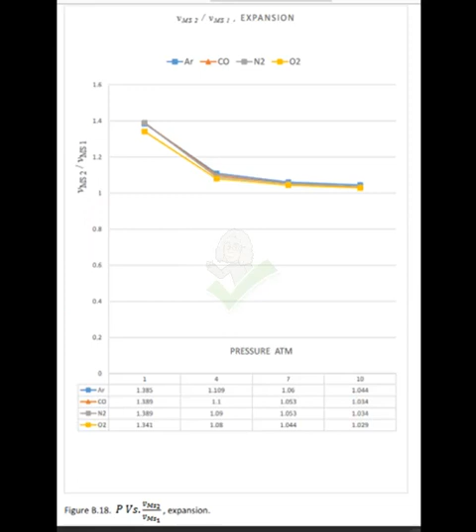The same happens with the contraction of gas. This is the reason why equations of state are not accurate, because they analyze an isolated state and do not study the two-state process.

Conclusion: the functions of different real gases follow the same trend because this is stipulated by the PVT relationship. The main factor that will define the divergence between functions and the difference between final volumes for the different gases—subject to the same heat source, the same mass, the same pressure, the same initial volume, and having the same initial mean molecular speed—is the momentum enthalpy, delta Hm, as a function of the heat capacity, Cp.

Scheme B shows a sequence of functions involved in the processes present in examples B.1 and B.2. It begins with the heat source, with equation 1.9, and how it impacts the momentum enthalpy and the heat capacity, equations B.0 and 2.3, of the different gases, as the input.

These two variables will define the rest of the parameters; here the gases differ among themselves. They take distance from each other, with the heat as the input and the temperature as the output.

Then the sequence splits into two paths. First, the EER equations 1.17 and 1.21, with temperature as the input and volume as the output, finishing this part of the sequence with equations A.2a and A.2b, with volume as the input and MFV as the output. In the other path, the MKT equation A.17, with temperature as the input and mean molecular speed as the output, finishes this part of the sequence with equation A.23, with mean molecular speed as the input and MFV as the output.

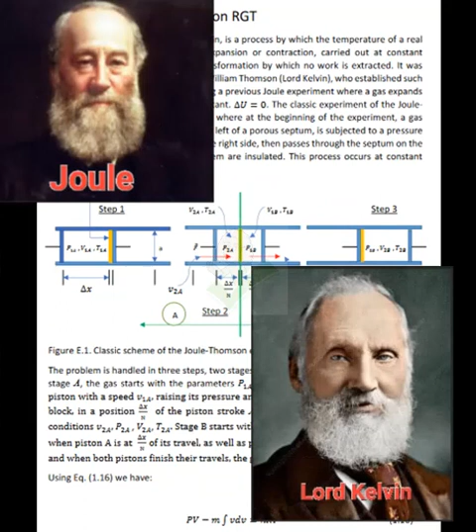The Joule-Thomson effect, or Joule-Kelvin effect, is a process by which the temperature of a real gas increases or decreases due to expansion or contraction, carried out at constant enthalpy, or an adiabatic transformation by which no work is extracted. It was described by James Prescott Joule and William Thomson, Lord Kelvin, who established this effect in 1852 as a result of modifying a previous Joule experiment where a gas expands while keeping the internal energy constant.

The classic experiment of the Joule-Thomson effect is shown in figure E.1, where at the beginning of the experiment, a gas contained in a volumetric section to the left of a porous septum is subjected to a pressure A, higher than another pressure B on the right side, then passes through the septum to the right side. The walls of the entire system are insulated. This process occurs at constant enthalpy.

The problem is handled in 3 steps, 2 stages, A and B. In the first step of the process, stage A, the gas starts with the parameters P1A, V1A, T1A, to then be compressed by a piston with speed V1A, raising its pressure and forcing it to pass through the porous block, at a position delta x/n of the piston stroke A.

Volume 1A is reduced and stage A ends, at conditions P2A, V2A, T2A, and velocity 2A. Stage B starts with the parameters velocity 1b, pressure 1b, volume 1b and temperature 1b.

Just when piston A is at position delta x/n of its travel, as well as piston B, finally, velocity 2b begins to decrease and, when both pistons finish their travels, the gas has the parameters P2b, V2b and T2b.

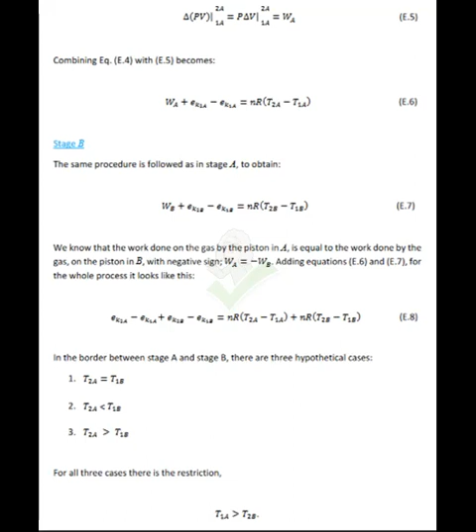In the border between stage A and stage B, there are three hypothetical cases: 1. T2A equals T1B. 2. T2A less than T1B. 3. T2A greater than T1B. For all three cases there is the restriction that the initial temperature is greater than the final temperature: T1A is greater than T2B.

This necessarily implies that molecules that accelerate in A and decelerate in B do so in such a way that the deceleration is different in magnitude than the acceleration, because for the ideal gas, the molecules accelerate and decelerate by equal magnitude. Now, in step 2, in the hypothetical case where T2A is less than T1B, to assume that the molecular speed continues to grow even when it has already crossed the porous wall and started the expansion is contradictory.

If the conditions have already changed, it is not logical that the growth trend continues. The trend must vary, either stop growing or start a slowdown. Therefore, the option where T2A is less than T1B is ruled out.

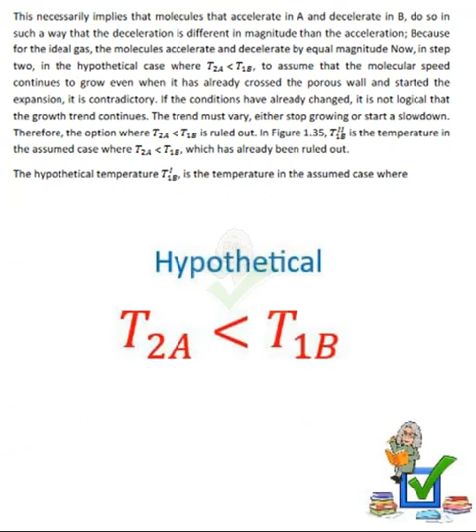In figure 1.35, T superscript 2 subscript 1b is the temperature in the assumed case where T2A is less than T1b, which has already been ruled out. The hypothetical temperature T superscript 1 subscript 1b is the temperature in the assumed case where T2A is greater than T1b. For this case, it is assumed that right at the border of the stages, instantaneously, the change in molecular tendency arises so that, at that point, suddenly, the temperature and molecular speed which had been growing now instantly decrease.

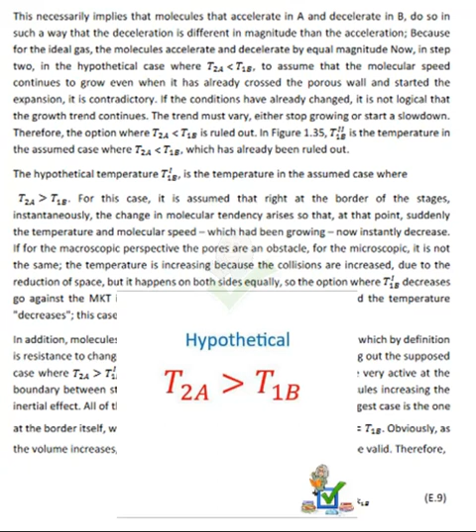In the supposition that the pores are an obstacle, in the macroscopic perspective, for the microscopic point of view it is not the same. The temperature is increasing because the collisions are increased due to the reduction of space, but it happens on both sides equally, so the option where T superscript 1 subscript 1b decreases goes against the MKT in the sense that the collisions are increased and the temperature decreases.

This case doesn't really happen. In addition, molecules, like any particle that has matter, possess inertia, which by definition is the resistance to change in its state of motion. All this contributes to ruling out the supposed case where T2A is greater than T1b. What's more, intermolecular forces, which are very active at the boundary between stages, contribute to the cohesion between molecules, increasing the inertial effect.

All of the above leads us to the conclusion that the strongest case is the one where, at the border itself, where delta x/n is such that velocity 2a equals velocity 1b, it is true that T2a equals T1b.

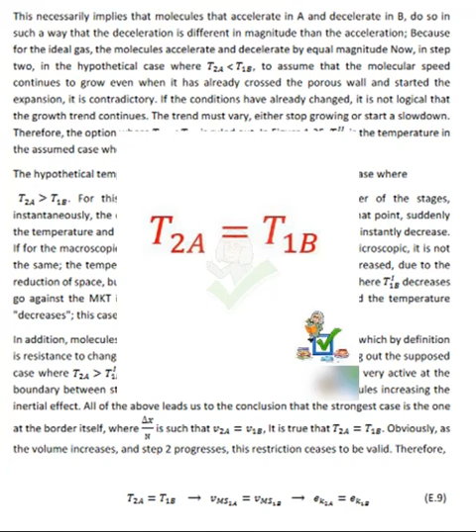Obviously, as the volume increases and step 2 progresses, this restriction ceases to be valid. Therefore, the fact that T2a equals T1b means that mean molecular speed in state 2a is equal to mean molecular speed in state 1b.

And therefore molecular kinetic energy in state 2a is equal to molecular kinetic energy in state 1b. By cancelling equivalent terms and grouping similar terms, equation E.8 may be rewritten as shown in equation E.10. Equation E.10 shows precisely the effect of intermolecular forces on the molecules of the gas, showing how much molecular kinetic energy was converted into molecular potential energy due to intermolecular forces.

The quotient on the right side of the equality in equation E.10 yields a negative value because this term represents a balance of kinetic energy throughout the system, which comes out negative because part of the kinetic energy of stage B was transformed into potential energy due to the action of intermolecular cohesion.

The Joule-Thomson coefficient may be obtained as shown in equation E.12 or in equation E.13.

Example E.1. Nitrogen has a Joule-Thomson coefficient of 0.2 degrees Kelvin per atmosphere at 25 degrees Celsius, 298 degrees Kelvin, over a pressure range of 1 to 50 atmospheres. Determine the final temperature of the gas.

If the initial temperature is 298 degrees Kelvin and 50 atmospheres pressure, the gas is stored in a vessel and passes through a throttling valve into another tank, which is at a pressure of 1 atmosphere.

The information we have is T1A equals 536.4 degrees Rankine, P1A equals 50 atmospheres, P2B equals 1 atmosphere, and the Joule-Thomson coefficient is 0.2 degrees Kelvin per atmosphere.

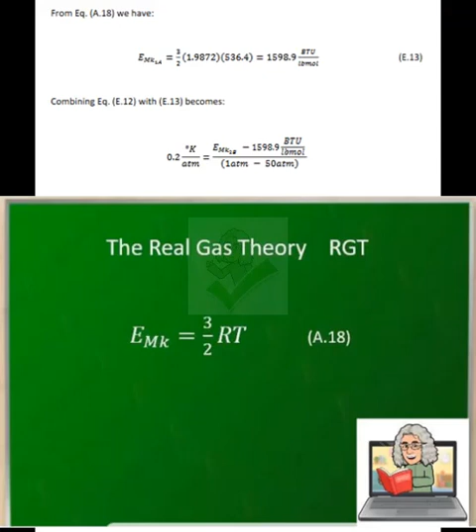From equation A.18 we obtain equation E.13. Combining equation E.12 with equation E.13 and solving for the molecular kinetic energy in state 2b gives equation E.14.

To solve equation E.14, it is necessary to transform the term on the extreme right side of the equation so that it has units equivalent to the other term. For this, we obtain the kinetic energy equivalent to that temperature as shown in equation E.15.

This energy represents the amount of kinetic energy converted into potential energy due to intermolecular forces. Combining equation E.14 with equation E.15 yields equations E.16 and E.17.

The temperature T2b is the temperature at which the molecular kinetic energy in state 2b develops. Therefore, it can be obtained from equation A.18. And its value is...

518.76 degrees Rankine, 288.20 degrees Kelvin. The final temperature drops about 10 degrees Kelvin with respect to the initial temperature, delta T equals minus 9.8 degrees Kelvin. Example E.2.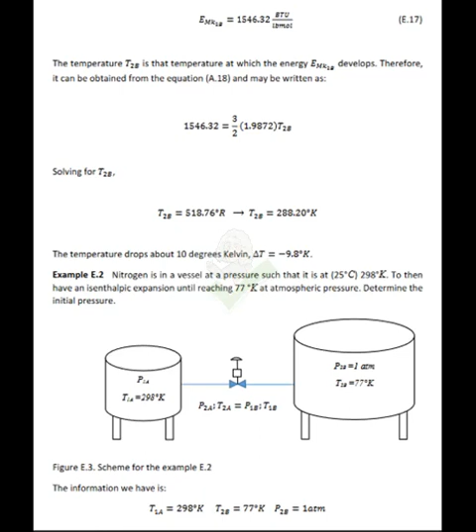Nitrogen is in a vessel at a pressure such that it is at 25 degrees Celsius, 298 degrees Kelvin, to then have an isenthalpic expansion until reaching 77 degrees Kelvin at atmospheric pressure. Determine the initial pressure.

The information we have is T1A equals 298 degrees Kelvin, T2B equals 77 degrees Kelvin, P2B equals 1 atmosphere. From equation E.12 we have equation E.18. To know the initial pressure, we integrate equation E.18, which then yields equation E.19.

In the example above, a constant Joule-Thomson coefficient was used for a specific pressure range, 1 to 50 atmospheres, at 25 degrees Celsius, but we know that the coefficient μ is actually a function of both pressure and temperature. For this example, the coefficient is not constant, see figures E.4 and E.5.

In order to take the coefficient out of the integral, we resort to a procedure similar to that already used for the mean heat capacity. That is, we seek to obtain a mean Joule-Thomson coefficient.

This mean coefficient is obtained with the mean value of the pressure, in μ as a function of mean xp, where the mean xp is the average of the values of pressure graphed in figure E.5. That way, it is already possible to handle it as a constant value in equation E.20.

From the data used to make the graph of the coefficient μ in figure E.5, we obtain the mean xp, which is equal to 360.9 atmospheres, where n equals 10. Figure E.5 shows the point of the mean xp and the respective value of mean μ.

The initial pressure is determined by solving for P1A in equation E.20. P1A is equal to 357.45 atmospheres. The modeling of expansion-contraction processes by numerical methods.

Once the expansion-contraction processes are defined as a concentric layer movement and molecular flow, the compressible fluid flow theory can be applied to this process.

We know that the mathematical models for compressible flow vary according to the type of flow, whether supersonic, sonic, or subsonic. Although considerable speeds could be developed, the truth is that subsonic flow is the most common for the expansion-contraction of a gas. Common functions used for compressible fluid flow are phi and psi.

These functions are called velocity potential and the stream function, respectively. If we define density as a continuous property and use the Eulerian description of fluid flow, we can state that this is both a function of position and time. Another way of describing conservation of momentum that helps us develop the approach is the one shown in equation E.21.

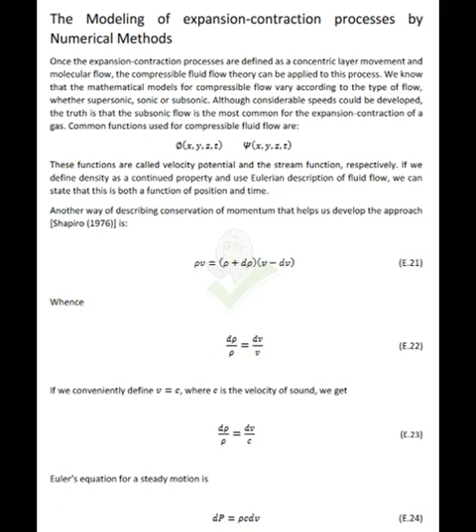Rearranging, we have equation E.22. If we conveniently define the velocity vector v equals c, where c is the velocity of sound, we get equation E.23. The Euler's equation for steady motion is shown in equation E.24, and is the same as equation 1.8 that we have already seen.

Combining equation E.24 with equation E.23 and solving for c yields equation E.25a. An alternative equation, combining equation E.23 with equation 1.7a, results in equation E.25b. Equation 1.7a in vector form becomes equation E.26a, where u is the horizontal component and v the vertical component of the velocity vector. These components may be written as a function of the velocity potential and the stream function, respectively, as shown in equation E.27a for the stream function and equation E.27b for the velocity potential.

There is an additional notation as the one we present here. Then equation 1.7a may be written as shown in equation E.26b. The combination of equation E.26b with equation E.25b results in equation E.28.

The differentiation of equation E.28 with respect to x becomes equation E.29a, and with respect to y becomes equation E.29b. The continuity equation for this notation is presented in equation E.30. The combination of equations E.29a and E.29b with equation E.30 results in equation E.31.

The term on the right side of equation E.31 is a function of time. If we define it as a function g, and multiply the same equation by minus c squared, we get equation E.32a. Equation E.32a is the general equation that governs subsonic compressible fluid flow with the velocity potential, and it is the equation we use to model the expansion-contraction processes.

But if, for convenience, we deal with equation E.32a for the steady state at the moment, it becomes equation E.32b. The function for c is presented in equation E.33. Equation E.33 is very useful because, to solve equation E.32 by numerical methods, it is appropriate to use an iterative procedure, and equation E.33 is used to obtain the speed of sound used in equation E.32b in each iteration.

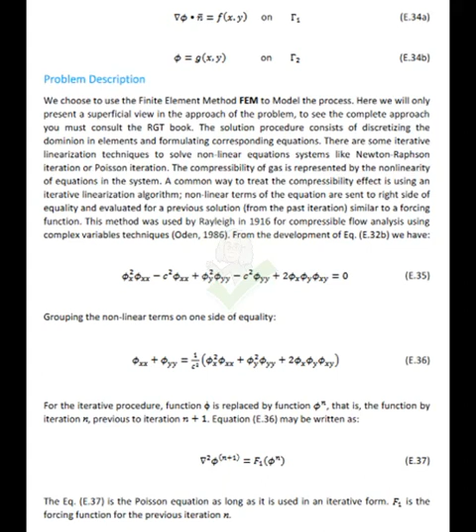The associated functional, equivalent to the field equation E.37 and its boundary conditions, equations E.34a and E.34b, is the one presented in equation E.38, where uppercase gamma 1, that belongs to the domain of omega, and the function f, represent the Neumann boundary condition.

And on the boundary uppercase gamma 2, the function phi is equal to a constant. The physical meaning of the function phi being constant is that the change of the variable with respect to the vertical is zero, and the velocity vector is perpendicular to the transverse surface.

For example, figure E.6 shows an expansion piece where the function phi can be seen at some points of the domain. The disturbance here is the change in areas caused by the change in the solid border angles. For phi to be constant, it must be far from the disturbance, and the border uppercase gamma 2 can be placed there.

The Neumann boundary must be placed far enough from the disturbance that phi remains constant, and the border uppercase gamma 1 can be placed there. This condition represents the input velocity. The phi function starts being constant, but once it reaches the disturbance it stops being constant, and when it moves away, it returns to being constant.

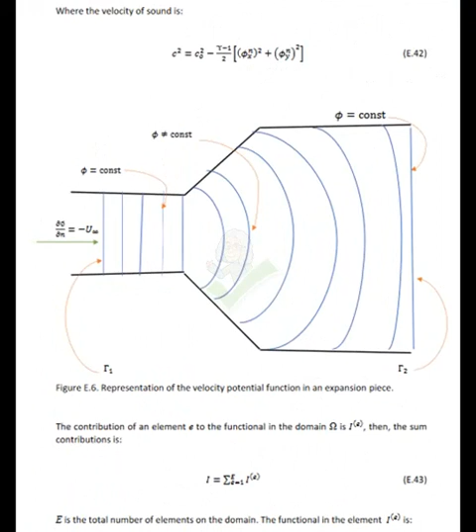The forcing function in equation E.37 is shown in equation E.41, and the function of the velocity of sound is shown in equation E.42. The contribution of an element E to the functional in the domain omega is I superscript E. The sum of contributions is presented in equation E.43, where E is the total number of elements in the domain. The functional in the element I superscript E is shown in equation E.44.

Note that only superscript n from the previous iteration was included; superscript n plus 1 was excluded for better readability. The second partial derivatives in equation E.41 may be defined as the ones written in equation E.45, where the corresponding Jacobian, J2 superscript E, is presented in equation E.46.

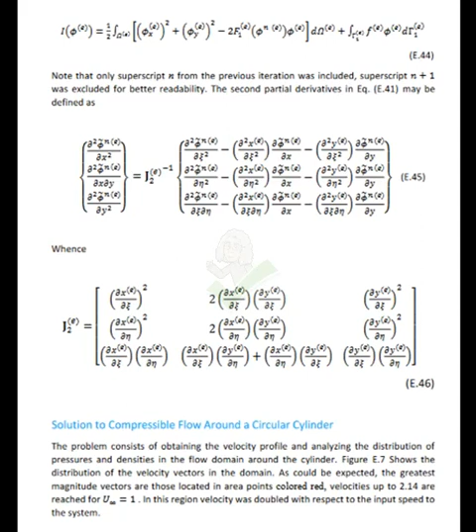Solution to compressible flow around a circular cylinder. The problem consists of obtaining the velocity profiles and analyzing the distribution of pressures and densities in the flow domain around the cylinder. Figure E.7 shows the distribution of the velocity vectors in the domain.

As could be expected, the greatest magnitude vectors are those located in the area with points colored red. Velocities up to 2.14 are reached for u equals 1. In this region, velocity was doubled with respect to the input speed to the system. In figure E.7 we can see that the vectors colored green have a velocity of more or less 1.

As these vectors approach the lower region of the circumference, velocity starts to reduce. The vectors colored light blue reach a velocity up to 0.7 and down to 0.36. But the vectors that approach the lower corner are those colored purple, with velocities from 0.36 down to 0.

On the other side, the vectors that approach the upper region of the circumference are colored yellow, orange and red, and have velocities from 1.07 up to 2.14.

Solution to compressible flow through a sinuosity. Figure E.8 shows the distribution of the velocity vectors in the domain. For an input speed of u equals 1000 feet per second, the vectors that fall down in the sinuosity reduce their velocities to under 699 feet per second. The vectors that reach the top region of the sinuosity have velocities up to 1300 feet per second.

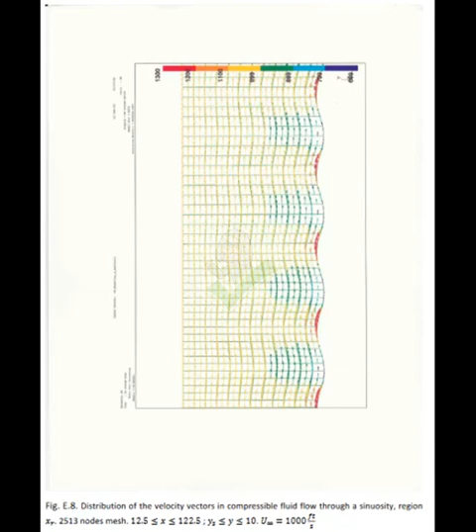Formulation for real gas. The formulations shown in this work are used to pose the solution to the expansion-contraction of a real gas. For that, two concepts that make up the thermodynamic phenomenon are handled: the diffusion of heat in the gas and the arisen convection.

Using this value, we obtain the densities rho superscript n plus 1. Once the densities are obtained, G is calculated. Note that the data of iteration n are known. Finally, from the term at the center of equation E.49, the solution matrix phi is calculated with equation E.48.

With the velocity potential, pressure profiles P and velocity components U' and V' are obtained. All this is for a period delta t. For the next period, the mesh is modified, and the process is continued.

Literature presents various formulations for the FEM, for the different types of heat transfer: conduction, convection, etc., like the one presented in equations E.51 to E.54. The element function uppercase Q is the equivalent of element function F1 in equation E.41, and the element function lowercase q is the equivalent of element function F in equation E.39, shown in equations E.55 and E.56 respectively.

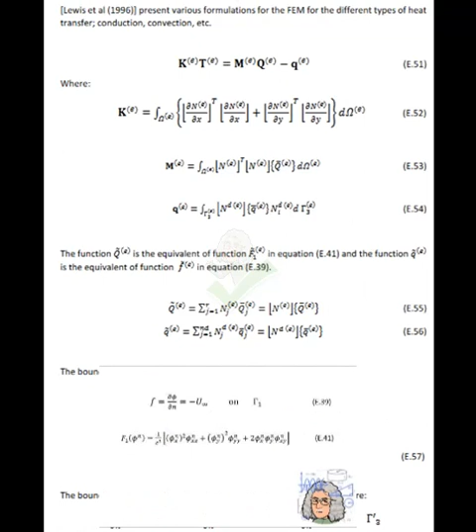The boundary conditions are presented in equation E.57. The Neumann boundary conditions for heat transfer, for equation E.51, applied to this case, are shown in equation E.58. And for the MFV, for equation E.48, they are shown in equation E.59.

In figure E.9, the flux Q is normal to a plane perpendicular to the tangent line to the curve, uppercase gamma prime 2, and goes in the opposite direction of U. This flux and U do not exist on the borders, uppercase gamma prime 3 and gamma prime 1. The Dirichlet boundary conditions are placed on the lines uppercase gamma prime 3 and gamma prime 1, where temperature and the function phi are constant.

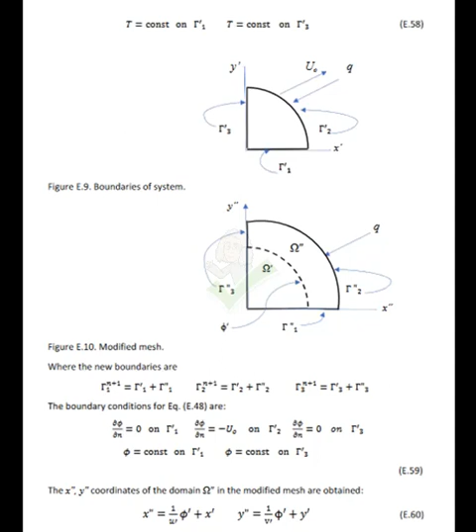All this is for a period delta t. For the next period, the mesh is modified, and the process is continued.